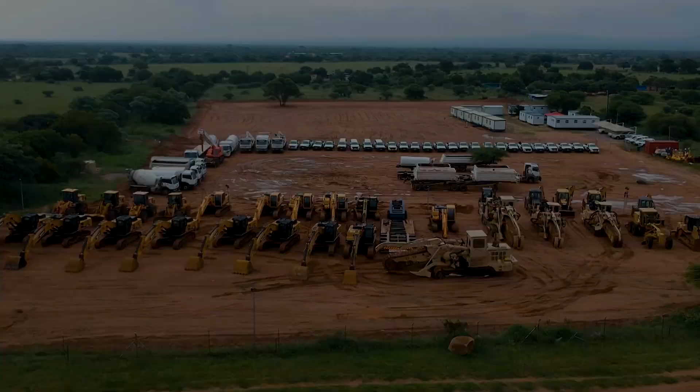With the mission to execute strategic infrastructure development projects in order to contribute to the development of sustainable communities across Africa, Khato Civils is surely living up to its mandate.

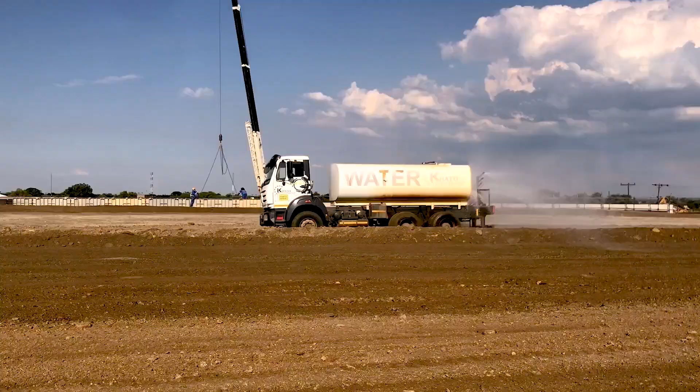The construction conglomerate has a proven track record of possessing expertise and capacity on a wide range of works, ranging from concrete specialization, infrastructure development, bulk earthworks to construction.

For this reason, the company is seated among top successful and well-managed black-owned construction enterprises in Africa.

At the helm of the company is businessman of note and construction guru, Simbi Phiri.

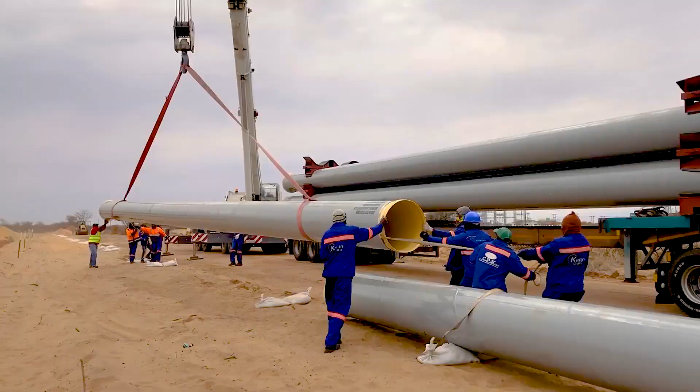Phiri is the chairman of Khato Holdings, which has under its wings construction company Khato Civils, engineering company South Zambezi, and equipment company Khato Equipment.

The company has a magnificent head office structure on Samrand Avenue, Centurion, in South Africa. At the head office is the Khato main office building, the South Zambezi head office, a workshop, and a warehousing structure.

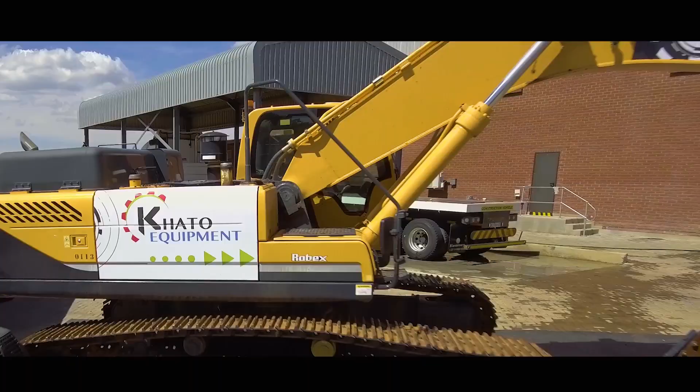Khato Holdings — because, you see, as you start running the companies, you realize that one company alone won't be able to complement itself. So you need complementary companies, you need other companies.

So we had Khato Civils, and we had to have the holding company, which is Khato Holdings, that is holding Khato Civils. Under Khato Civils, we've got Khato Material and Khato Equipment.

Mr. Simbi Phiri has steered the company with exceptional ingenuity for decades.

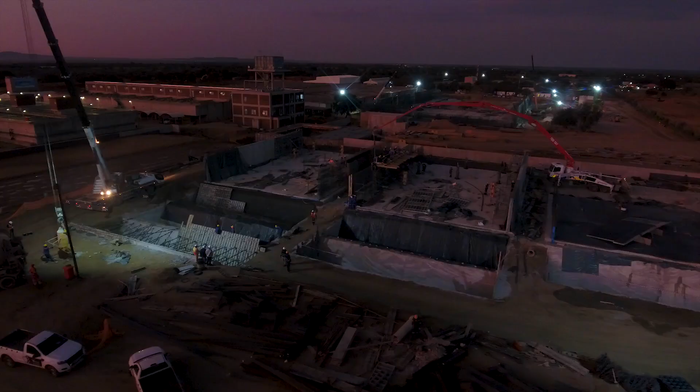With his wife Kanyisiwe Phiri, who heads South Zambezi, and CEO Mongezi Mnyani, the team has provided leadership that has seen Khato Civils deliver sophisticated engineering works.

If you don't own your own equipment, efficiency is compromised. You cannot deliver on time. Let me tell you what happens.

You say, I need an excavator. The guy doesn't say it's not available — he says, well, pay and we'll deliver.

Now you sit and you pay. Two days later, the excavator is not coming.

And then when you inquire, they will tell you, no, we thought you haven't paid yet — because they are waiting for the excavator to come from somewhere.

And meanwhile, your workers are just sitting. They can sit for three weeks. Come end of the month, they are asking you to pay them, because as far as they are concerned, they didn't work because you were inefficient yourself.

It's a tough call being an entrepreneur. The laws sometimes look like they work against you, because you've got to pay people that didn't work. But in terms of the law, they came to work.

Do you see that? They came to work. It's you who failed to give them equipment. So I'm saying, we've achieved this by getting the best personnel and best equipment, and that has made Khato the efficient company that we are talking about, according to the gradings.

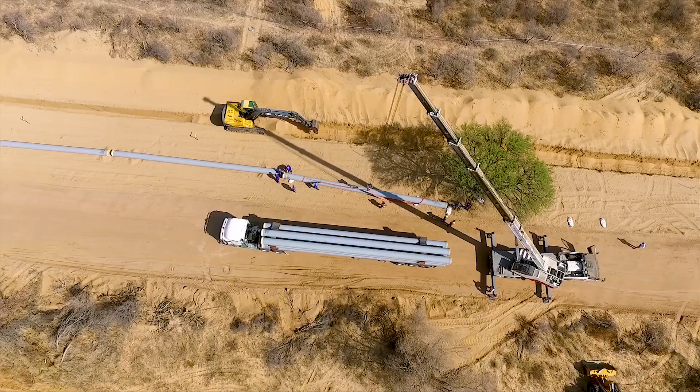In Gaborone, Botswana, the government of His Excellency the President of Botswana, Dr. Mokgweetsi Eric Keabetswe Masisi, has placed provision of potable clean water among its highest priority areas.

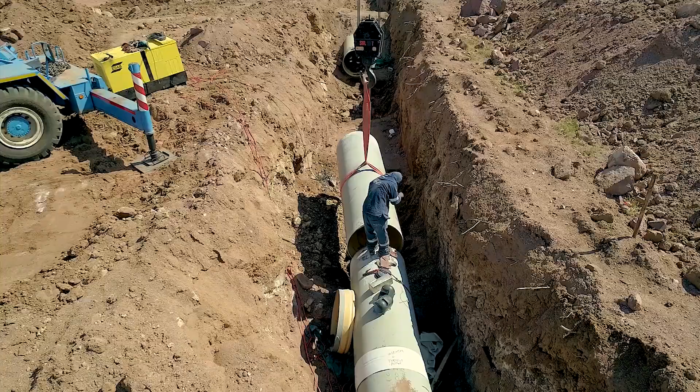The government is demonstrating this by allocating resources in the development budget. In October 2021, a Khato Civils–South Zambezi joint venture constructed and delivered to the government the 100-kilometer Mmamashia water pipeline project.

The joint venture was also awarded a follow-up contract to design, supply, construct and commission the Mmamashia water treatment plant, situated at Mmamashia, which will be operated and run by the Water Utilities Corporation.

The 100 kilometers which we completed sometime last year — it brings the water into the old water treatment plant.

And with this one, upon the completion of this one, we have a connection, because our line enters the old water treatment plant at the mixer 3 chamber.

But at the mixer 3 chamber, for those who may recall, we had left a blank flange. That is where we will now open that flange and connect that pipe to our current mixer 4.

Mixer 4 is in the background. So upon completion of these structures, one of the connections which we will reactivate is that one from mixer 3 to mixer 4, which will now bring the 100-kilometer pipeline also into this water treatment plant.

The works on site are well on course and ahead of schedule. Let me say that the lab which is existing there is the one which is monitoring the quality of the water which is being given to the nation.

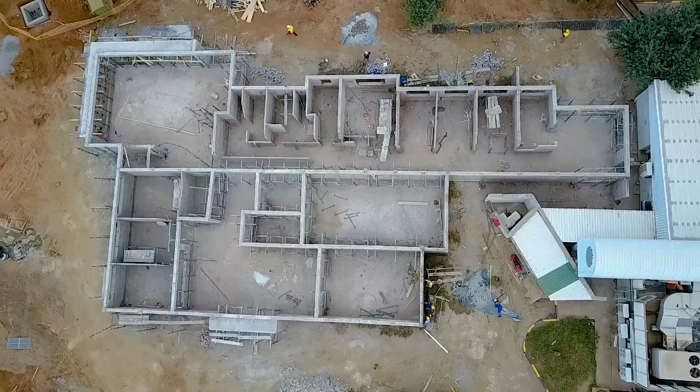This is for quality control, making sure that the water being fed to the people is of high quality. At the close of May 2022, the main analytical laboratory was roofed, and over 50% of the works were completed on the constant level tank, settling tank, and the hopper work area.

To start with, that structure there is the inlet tower. This is where the water will arrive, just like we did on the 100 kilometers project, where our inlet tower was the arrival point for water from Masama. So wherever the water is coming from, it comes through the inlet tower.

Across the road here, we are going to connect the inlet tower with the blending chamber. The blending chamber is where our water will enter the flocculation channels. The flocculation channels are basically channels for aerating the water and giving it flow and mix.

From the flocculation chambers, it arrives where we are now, on the settling tanks. Before it arrives at the settling tanks, it will fill up these V-shaped hoppers.

These V-shaped hoppers plus the tanks around us are where the water will sit. There are also channels here which will still have movement of the water, so this whole area will be filled up with water.

The dirt, sediments, and silts will go to the hoppers, and from the hoppers, they will separate the clean water, sub-clean water, and the silt and dirt. The dirt will then be sucked out by sludge pipes, taking it from the hoppers.

Along that retaining wall, there is a reticulation of sludge pipes, ranging from 450 diameter to 600, which will take the sludge to the lagoons. Those are the lagoons at the back there, which hold the dirty water - basically that is mud.

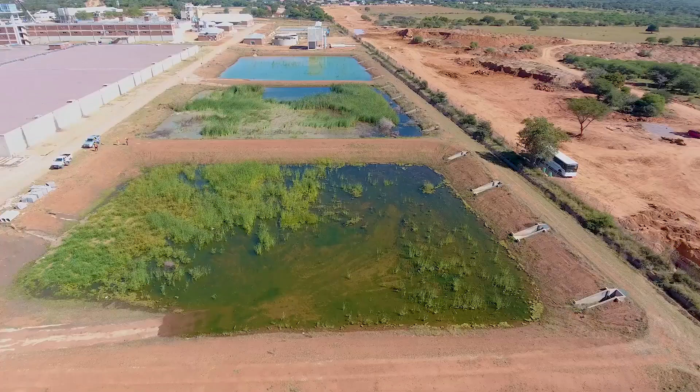Now the water, when it has settled here - that's why these are called the settling tanks - there are 6 of them, 6 modules. All 6 modules are interconnected with one channel, which takes the water towards module number 1 under the retaining wall, and it goes to the filters.

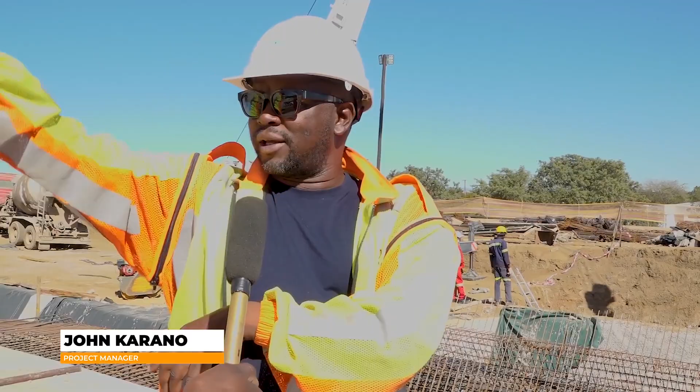At the filters, the water will be subjected to more filtration. Here it will be settled, and it will be clear to your naked eyes, but it will still not be filtered. When it goes to the filter, that's where all the physics of separating the silt happens, going into detail before it gets chemicalized.

From there, it will be sent to the constant level tank. The constant level tank is basically a reservoir to store the water.

Then it will be pushed to mixer 4. Mixer 4 is basically where it will also meet with the water from the 100 kilometers line. From there, it will be ready to be dosed with chemicals, chlorine, and then sent to the MBR, which is the storage facility.

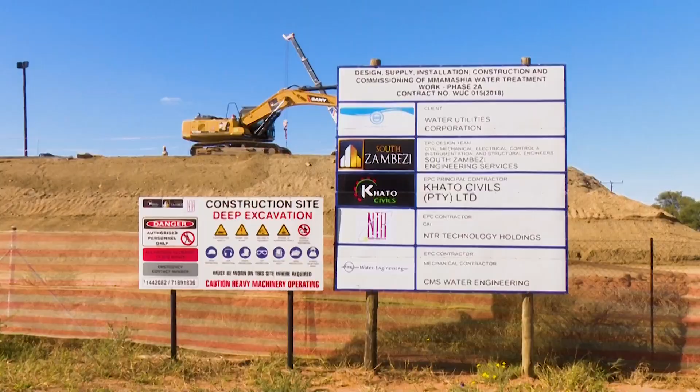South Zambezi has been instrumental in this joint venture. The company is responsible for all engineering services and designs for the water treatment project.

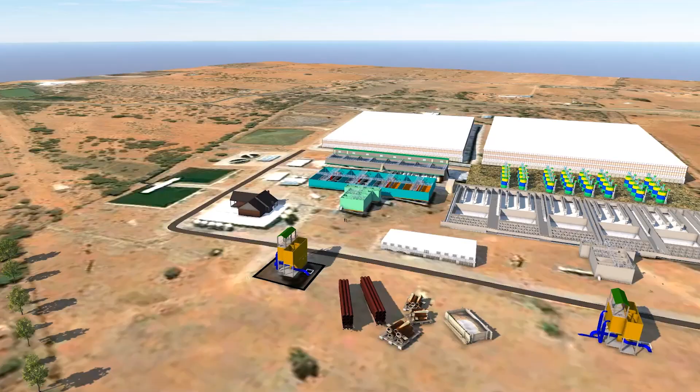Tinofirei Mawanza is project director at South Zambezi. What we are seeing on the screen now is the full Mmamashia water treatment plant.

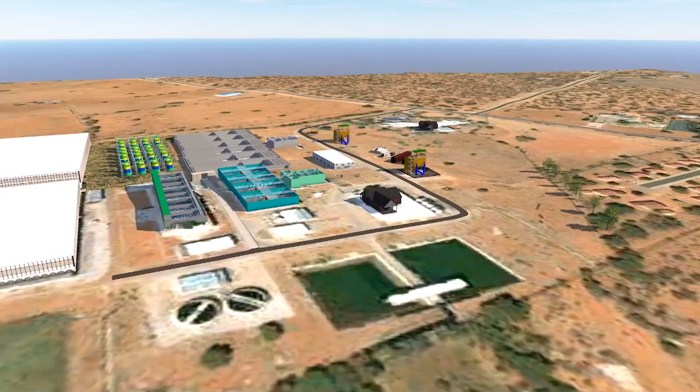It now involves the existing treatment plant structures as well as the current structures that we are building or constructing under Phase 2A NSC 2.2 scheme.

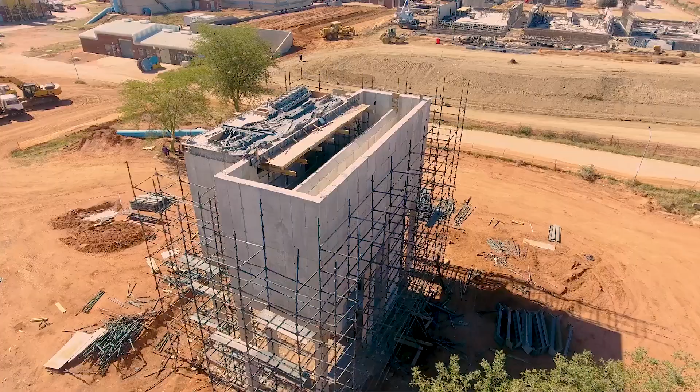Item number 1 is our inlet tower, which we have just constructed and completed. It's strictly just to diffuse pressure. By diffusion, we simply mean the water approaches there with a very high pressure, and then we reduce it to pressure or energy that is compatible with our treatment processes. That's exactly what we are doing, and this structure has already been constructed and is complete.

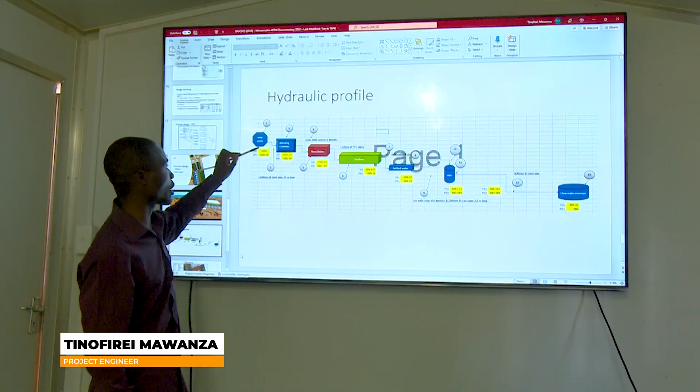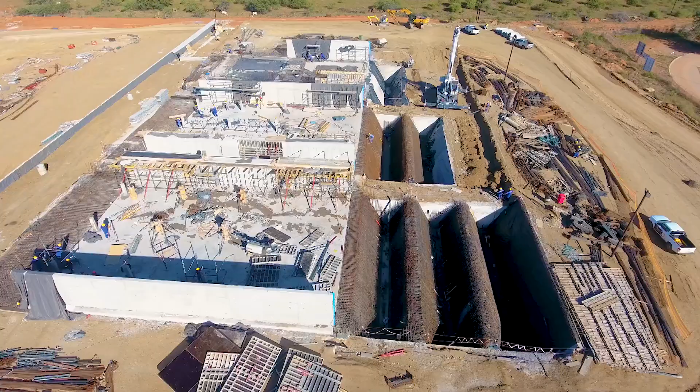We have the blending chamber or structure, that's where we add chemicals. This process then gives us stage 8, that is the settled water, water that has been separated from solids, and this water is what we direct to the filters.

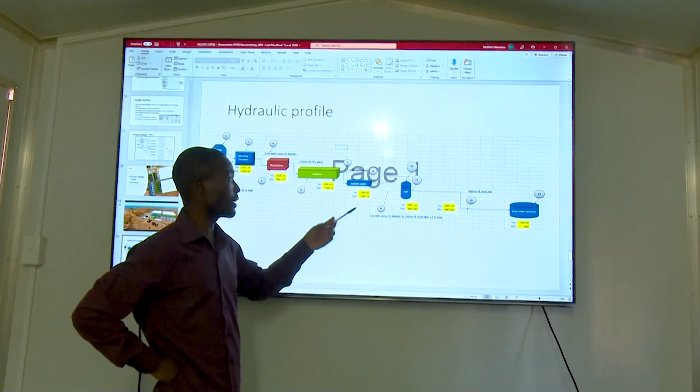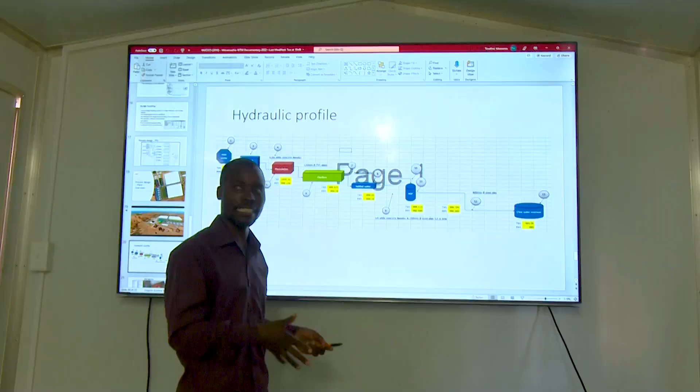The filters, as we said earlier, we have designed and are currently constructing what we call rapid gravity sand filters, which means the water is made to pass through the sand filter media by gravity as it infiltrates, removing very minute impurities that would have proceeded from the clarification process.

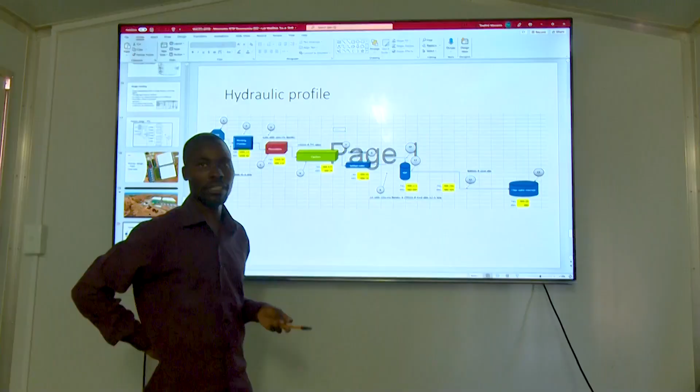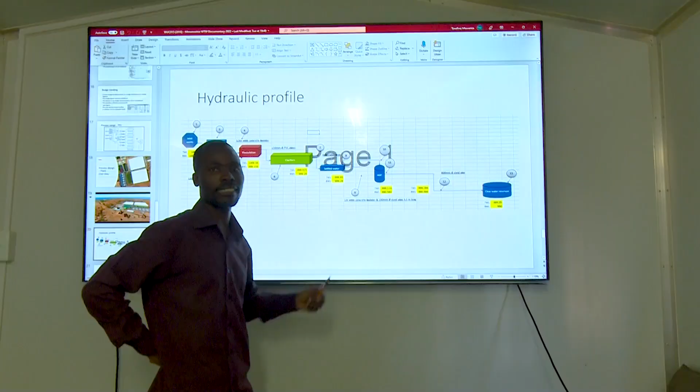Then from the filters, we pump that water to the GAC that I spoke about, and it's again done in the same unit back to back to polish the water in terms of smell, taste, color, and the removal of organic contaminants which would not have been removed by any of the earlier processes.

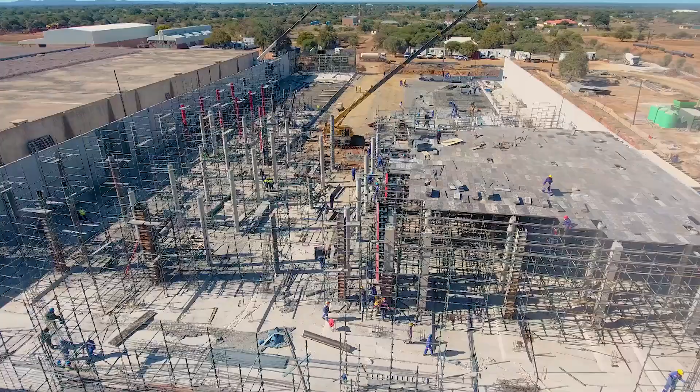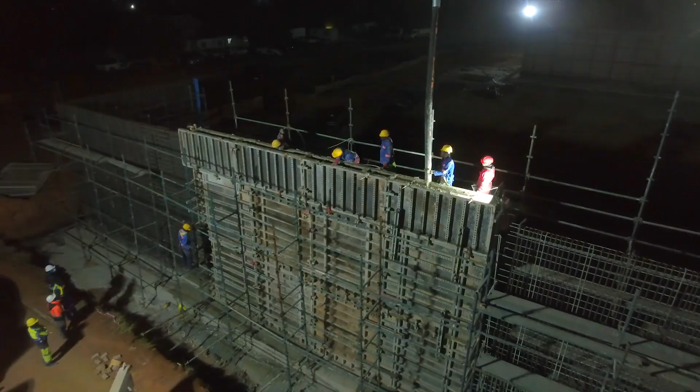Once completed, the new Mmamashia water treatment wing, dubbed Module 2A, will receive and treat 110 megaliters of raw water per day, thereby increasing the total plant flow to 220 million liters per day.

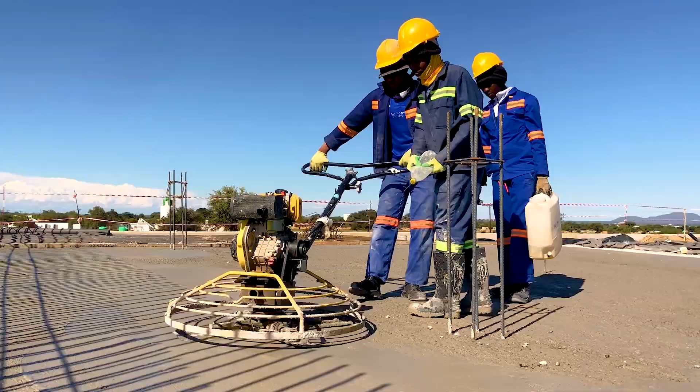Alan Mawambe is one of the project managers at Khato Civils. He says the project aims to build and increase capacity of the current plant to handle maximum flows, which will be provided by the north-south carrier pipelines.

In terms of this capacity in Botswana, they've got a smaller one that they've done in Botswana, but this will be the flagship. If we are talking of Botswana at large, this is the flagship GAC filtration system that we have here. So that is where the water comes in.

Then once it leaves the filter, we dose it again. This is now the post-dosing, which happens at mixer 4, where they add chlorine dioxide and residual chlorine, just to clear the water before storing it in the mass balancing reservoir.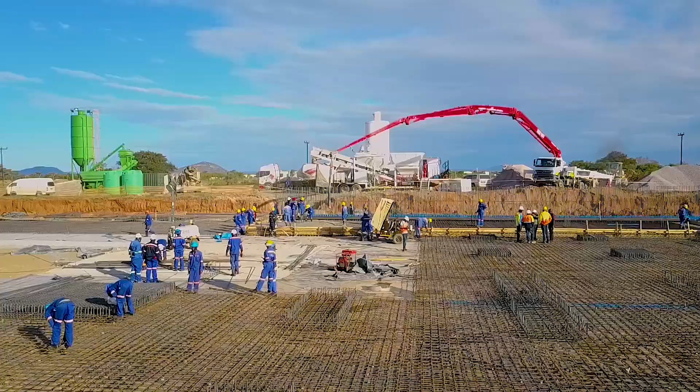Just as the 100-kilometer pipeline, construction of the water treatment plant at Mmamashia is having a huge economic bearing, from job creation, the materials supply chain, to small-scale businesses.

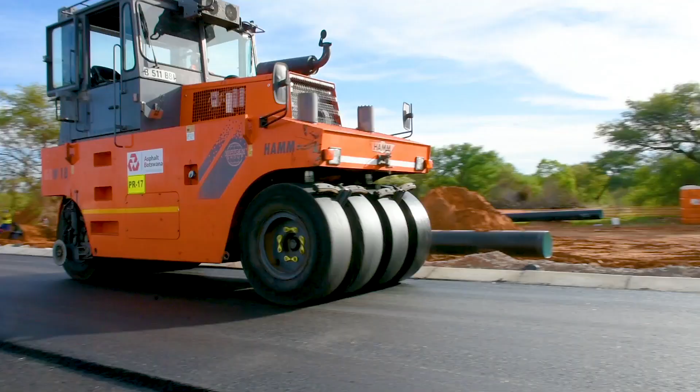The water treatment plant works had another component for Khato Civils to construct a 2-kilometer access road from the water treatment works office to the A1 junction, and this has already been built.

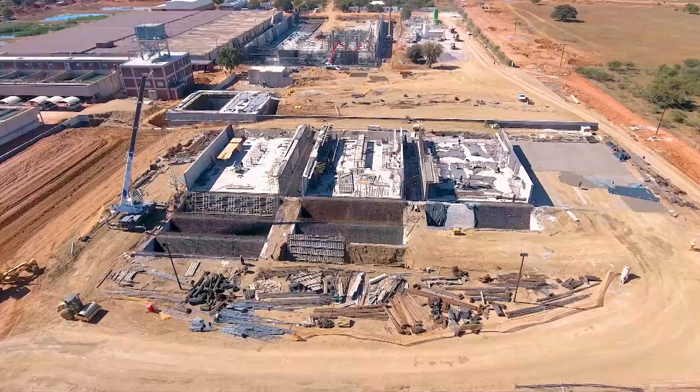Construction works for Mmamashia water treatment plant in Botswana's capital Gaborone will without doubt address long-standing water shortages for generations to come. Khato Civils continues to demonstrate ingenuity and versatility as it spearheads an infrastructure revolution on the African continent.

As the Director of Finance, my main role is to make sure that the project is within budget and is going to be done within time. To do that, I make sure that all the materials are delivered qualitatively and quantitatively as per what is on the BOQ.

In the areas where we work, some suppliers might also try to play games where they deliver a quantity which is not specified, or even a quality which is not specified. So my role is to make sure the quantity is delivered as per BOQ and also as per PO, so that when we are doing the payment, I don't have to worry what this was for. I'm here, so I have to see and know what's happening.

I also monitor the progress on site, making sure whatever we are working on is within timelines. When we did the tenders for this project, they told us this project would take so long. So if, as executives, we are not hands-on, it's a problem.

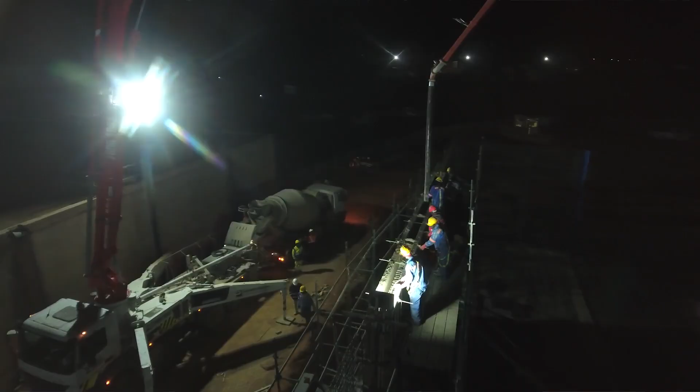I have to go meet different suppliers for steel, for concrete, to say, guys, this is what we need, these are our expectations. Please make sure on your side you have resourced properly in terms of the raw materials you need to input into our system. It also encourages the guys on site — if they see executives on site, they know they're not alone. You see, it's midnight, but we're all here. We leave here together, all of us, early in the morning, and we start again together, so they won't think they're doing anything we cannot do. All executive members always come on site.

So I'm here representing our company philosophy and culture on how to get things done within time and within budget. To do that, we cannot leave it to the last minute. It's in the process of the work that we monitor on a daily basis so that things are achievable as we prescribe.

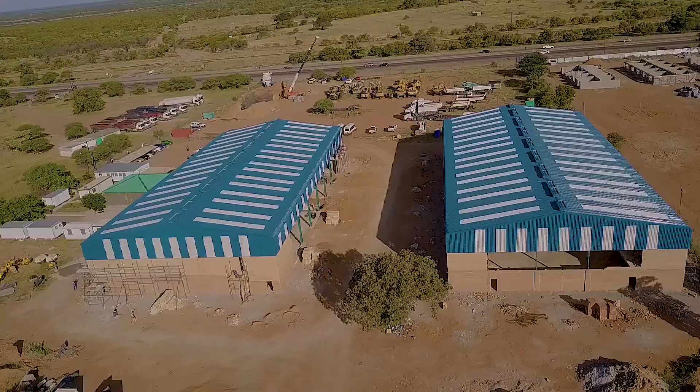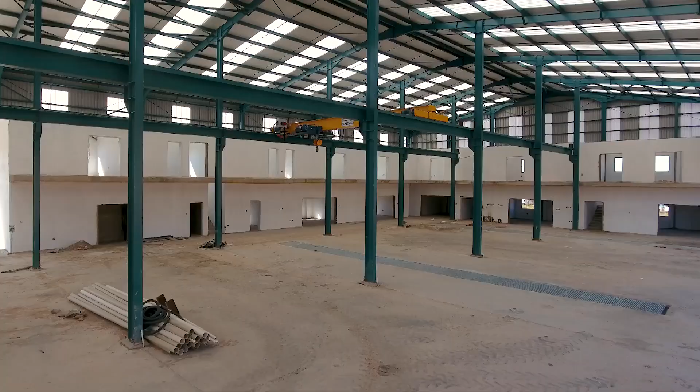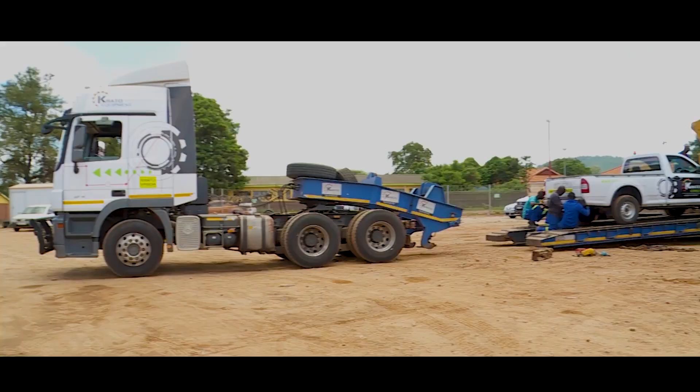To this effect, Chairman Simbi Phiri emphasizes that Khato Civils is determined to use ingenuity in construction to uplift and improve living standards of people on the African continent. I believe particularly that we have a duty to bring levels of infrastructure that are better and make people live lives in the rural areas better than they have.

We don't all have to be in the cities. You can still stay in the rural areas, but have clean water, access to good roads, access to broadband. These are the things we do. So I believe Khato has a future, because as long as Africa is undeveloped, surely Khato will be part of the development.